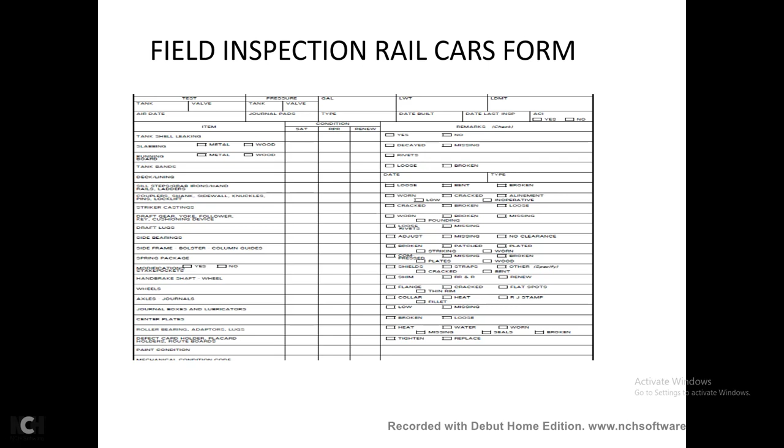Collar heat, RJ stamp fillet, journal box lubricators low or missing, center plates broken and loose, roller bearing, adapter lugs, heat, water worn, missing seals broken, defect card holder, placard holders, and route boards. Satisfactory repair, renew, tighten, or replace, paint condition, mechanical condition code.

Alright, your item: tank shell leaking. Is it satisfactory repair, renew with remarks, check yes or no?

Alright, leaking tanks. A leaking tank should be transferred as soon as possible. If leaking badly, temporary repairs must be accomplished. One method is stuffing waste or rags impregnated with a heavy lubricant into the opening to arrest the flow, where the rupture is not too great.

Too great a rupture, soap or clay may be adequate. These are strictly temporary expedients, only performed to provide time to transfer the lading to another car. If possible, the empty tank car selected to receive the transferred lading should have a similar commodity.

Otherwise lading may be contaminated, or two incompatible substances may become mixed. If possible, the load should be transferred by gravity flow. If gravity transfer cannot be made, siphon pressure may be used. Air pressure should be judiciously used only on cars loaded with heavy oils at a very low level.

Leaks in seams may be caulked temporarily by packing them with twine or lead wool, pushed into place with a sharpened piece of wood or bronze. After the twine caulking has been tamped into place, soap should be padded over it to form a ridge.

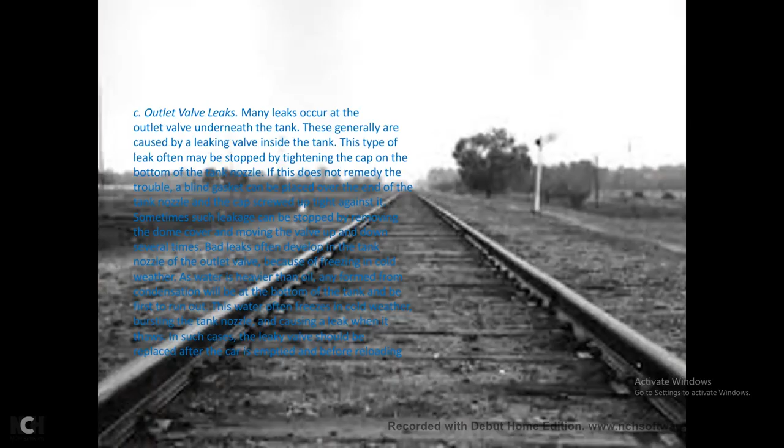Your outlet valve leaks. Many leaks occur at the outlet valve underneath the tank. This is generally caused by a leaking valve inside the tank. This type of leak often may be stopped by tightening the cap on the bottom of the tank nozzle. If this does not remedy the trouble, a blind gasket is placed over the end of the tank nozzle.

Tightening the cap screw against it, and sometimes such leakage can be stopped by removing the dome cover and moving the valve up and down several times. Bad leaks often develop in the tank nozzle of the outlet valve.

Because of freezing cold weather, as water is heavier than oil, water formed from condensation will be at the bottom of the tank and be first to run out. The water often freezes in cold weather, bursting the tank nozzle and causing a leak when it thaws.

In such cases, leaky valves should be replaced after the car is emptied, before reloading. Alright, slabbing: satisfactory repair, renew, check for metal or wood, check decayed or missing.

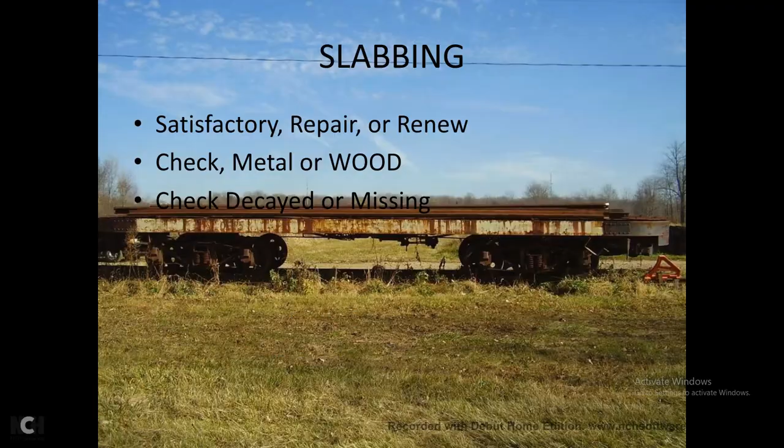When sheathing is damaged by shifting load or other accident, it should be promptly replaced. The damaged portion should be removed, not leaving the damaged remaining portion in place. New boards should be good quality without large or loose knots, and sheathing boards are wider at the opening end than the other. Care must be exercised to keep the boards plumb when nailing them in place.

The board shall be lightly nailed narrow on the first end, and then pried into plumb position and nailed down. The groove of the last board should not be broken off in order to insert the board. The last 3 or 4 boards should be fitted together in the form of an arc, then sprung into position and nailed down. Nails should not be driven into the tongues of the boards, as this splits them and causes leaks. It also prevents the boards from fitting tightly together.

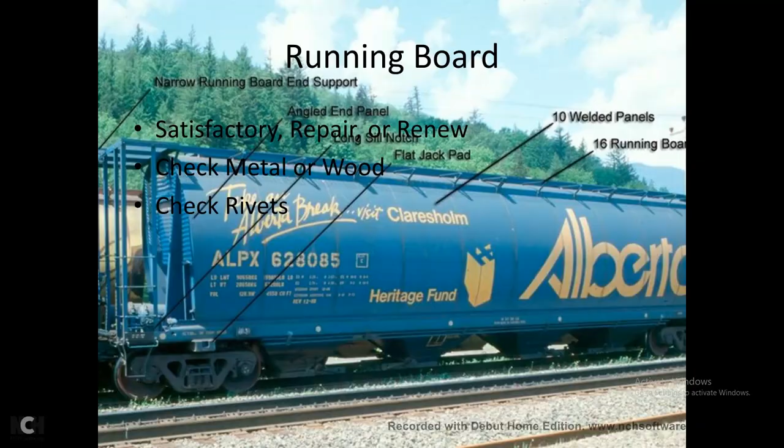Running board inspection: check for satisfactory repair or renewal, check metal or wood, check rivets. Running boards and saddles at the top of boxcars will no longer be required.

Per paragraph 914D of the technical maintenance manual for railroad cars, where used, running boards will be maintained in safe condition using AAR standards as a guide. Nails must not be used on the running boards. If screws become loose, they should be removed and the holes plugged, with new screws applied in another location and secured down tight. When running board saddles become decayed or split, they will be replaced.

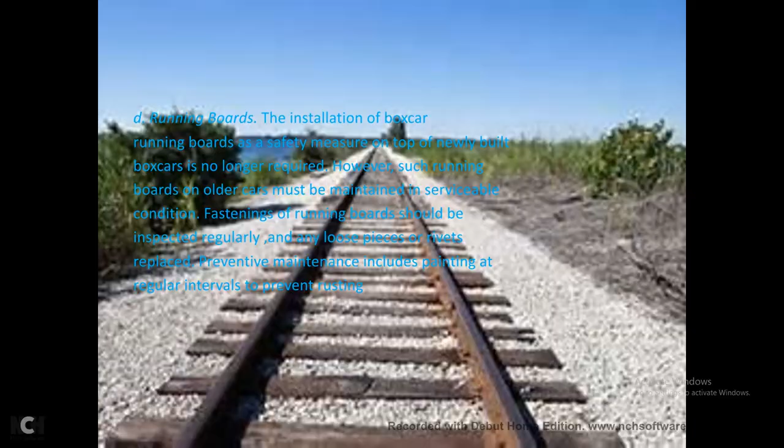The installation of boxcar running boards is a safety measure on the top of the car. Newly built boxcars are not required to have them; however, running boards on older cars must be maintained in serviceable condition. The fastenings of the board should be inspected regularly, and any loose pieces or rivets replaced. Preventive maintenance includes painting at regular intervals to prevent rust.

Tank bands: satisfactory repair, renew, or check for loose or broken shell plates. The repair or straightening of dented shell plates is generally performed in the same manner as repair of the tank heads, as discussed in section D of the tanker maintenance manual.

When it's necessary to remove the tank plate, care must be taken to avoid damaging it while removing the old rivets. The rivet should be driven, with the head on the outside and the buck on the inside, using a well-designed bucking bar instead of a hammer. Rivets must be tight, as loose rivets can be detected by holding a finger on the rivet and tapping it lightly with a hammer.

If loose, the rivet will vibrate slightly. A loose rivet must never be caulked; if it leaks, it must be replaced.

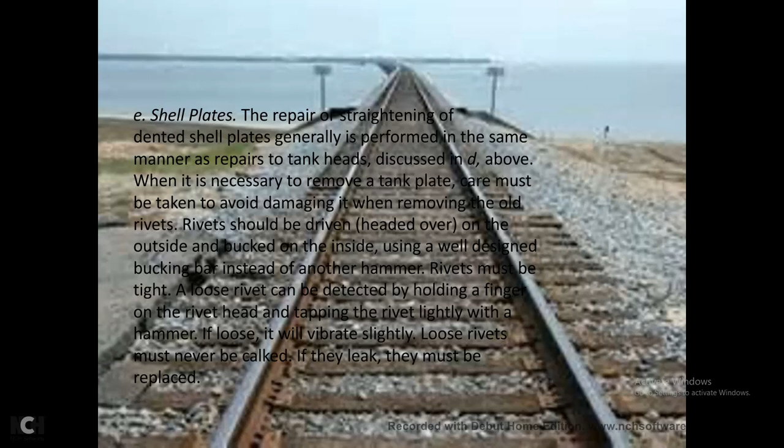Deck lining: satisfactory repair, renew, date, and type.

Flooring: damaged floorboards should be removed and replaced with new boards. If only one of two boards needs to be removed, split the one or both with a sharp pointed bar to prevent damage to the joining tongues and grooves. In any case, after the damaged floorboards are removed, the understructure should be carefully examined for other damage.

The bottom of the board's inner lining must be removed to allow removal of the floorboards, replacing them and applying new flooring. The boards must cover the projecting bolt or rivet heads; place the board in position and tap lightly to make an impression of the obstruction. Then cut a notch in the board large enough for the bolt or rivet head and secure the board in position.

Lining: when a lining is damaged, old boards can be readily pried loose and new ones fitted into place. If any of the larger boards must be replaced, it must be moved so that the belt rail work proceeds down or up as the case requires. When placing new boards, the one at the rail should be secured first before working downward or upward from it. This prevents having the last board positioned next to the belt rail.

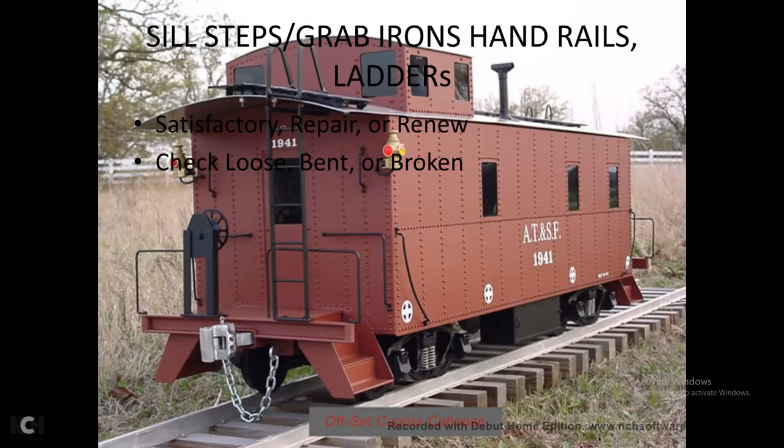Sill steps, grab irons, and handrails: satisfactory repair, renew, check for loose, bent, or broken parts.

Coupler, shank, and sidewall knuckles, pins, and lock lift: satisfactory repair, renew, check for worn, cracked alignment, or low, inoperative conditions.

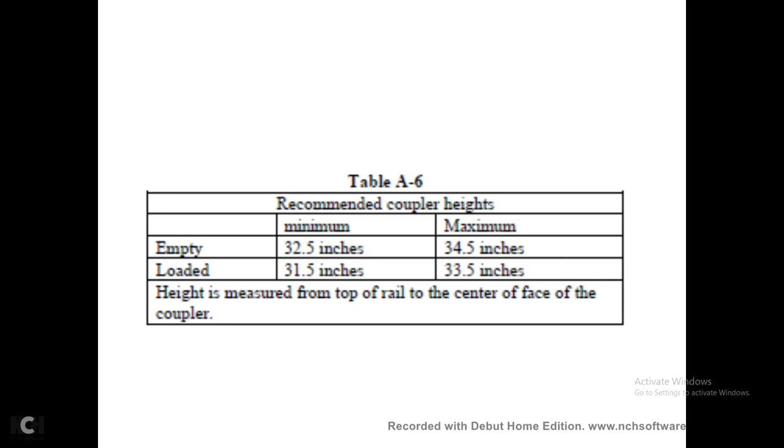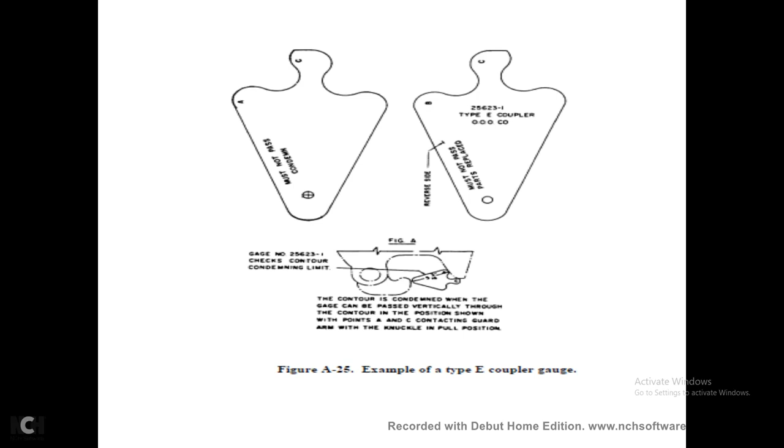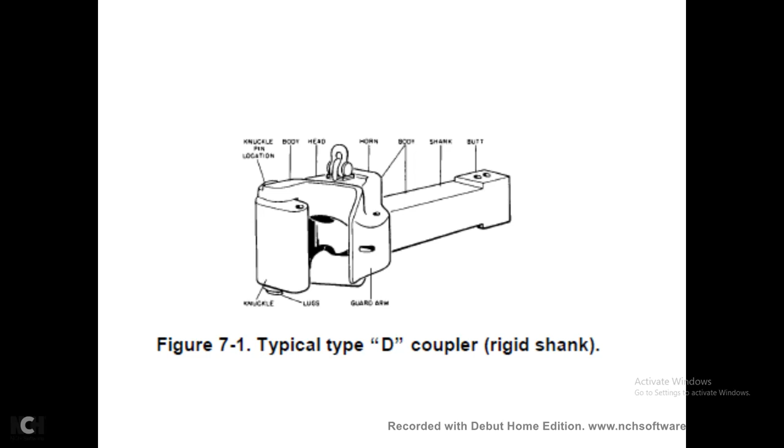Typical type D coupler, starting from the knuckle pin location: the body, head, horn, body, shank, butt, guard arm, lugs, and knuckle. This is a typical type E coupler.

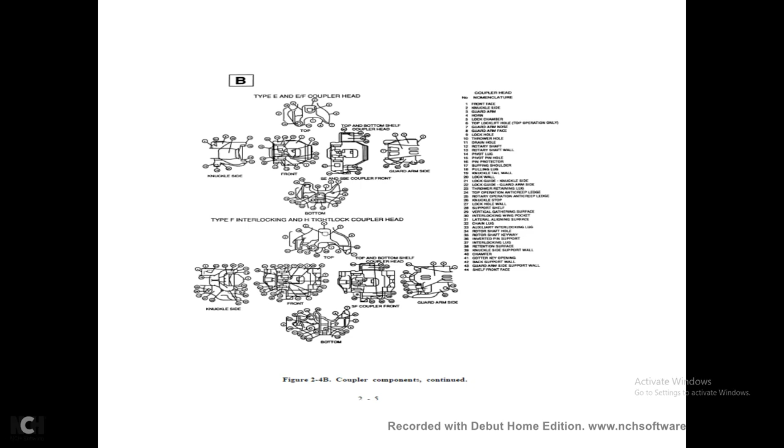This shows the type E and E/F coupler heads. Coupler components continued: type F interlocking and H tightlock coupler heads. Here is an example of a coupler shank head.

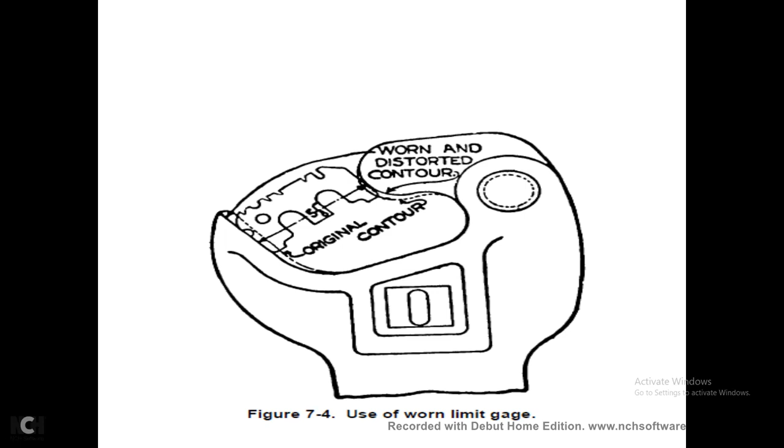Using a contour gauge, and using a worn limit gauge to check worn distorted contour versus original contour.

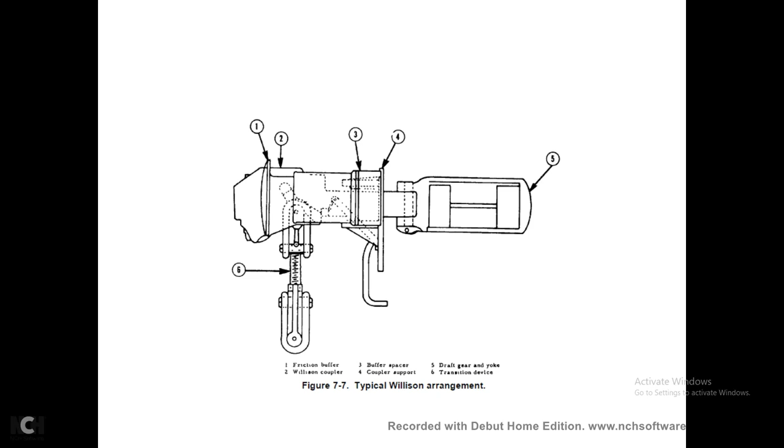2, the Willison coupler. 3, the buffer spacer. 4, the coupler support. 5, the draft gear and yoke. 6, the transition device.

7 and 8, operating parts of type E, Willison coupler: 1, the coupler. 2, the thrower arm and bolt and nut. 3, the lock. 4, the support hook. 5, the thrower. And 6, the filler block.

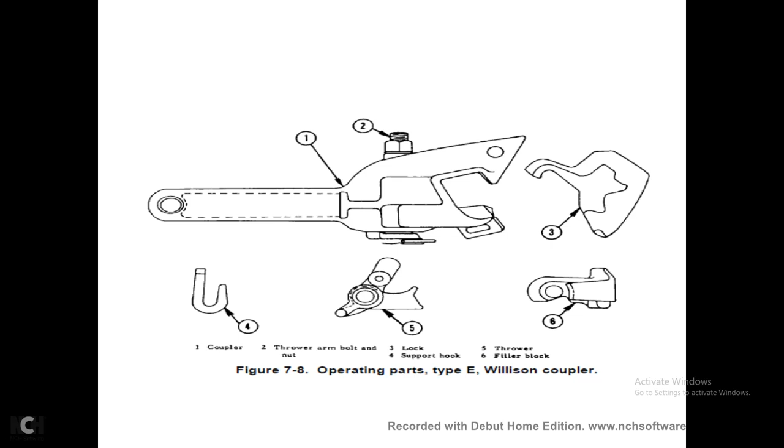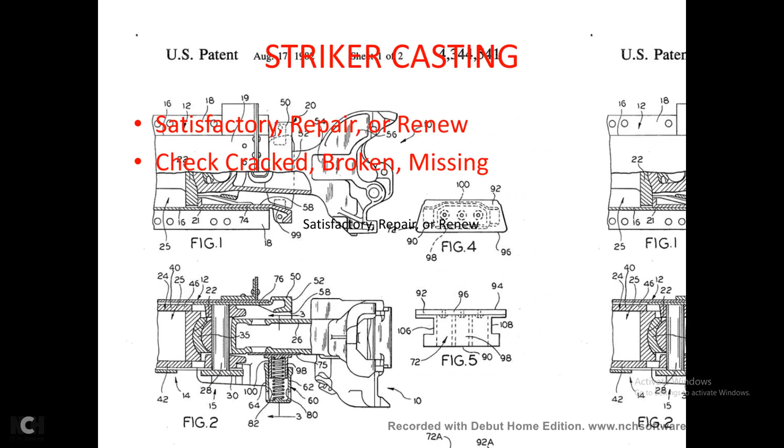Striker casting: satisfactory repair or renew. Check for cracked, broken, or missing parts. Satisfactory repair and renew.

The striker casting is a large metal casting secured over the inside end of the center sill. The casting has three main functions. First,

the lugs restrict the movement of the draft gear. It also acts as a support over the coupler shank. This is the main component to absorb heavy impacts of the center sill.

Due to this, the striker casting has a heavy metal block that lines up with the horn of the coupler. When the car receives excessive pushing force exerted against it, the coupler will compress the draft gear. This allows the horn of the coupler to contact the face of the striker. If the gear becomes severely worn or receives too much impact, it may become damaged, warning of possible problems with the equipment.

Draft gear, yoke, follower gear, and cushion device: satisfactory repair, renew. Check for worn, broken, missing, or pounding parts.

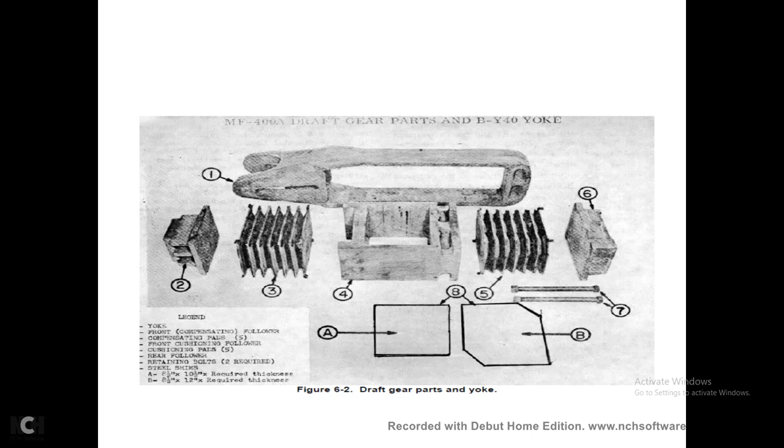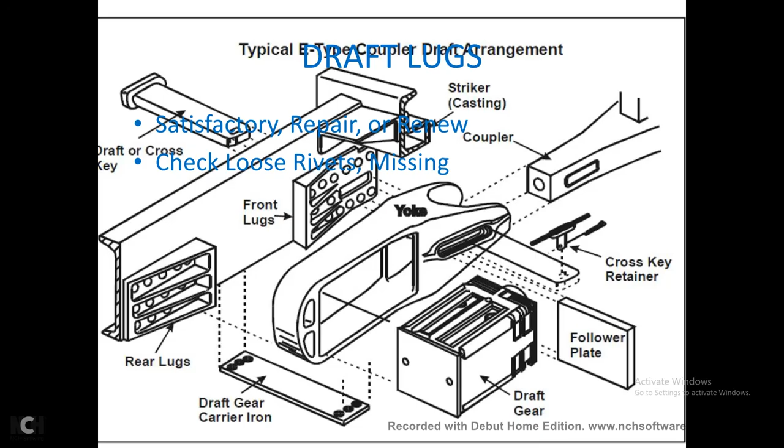Draft gear lug. The draft gear lugs, or draft lugs, can be broken down into front and rear lug. The rear lugs are secured to the center sill at the rear of the draft gear pocket; in some cases they may be part of the center plate spider casting. Front lugs are generally part of the striker casting.

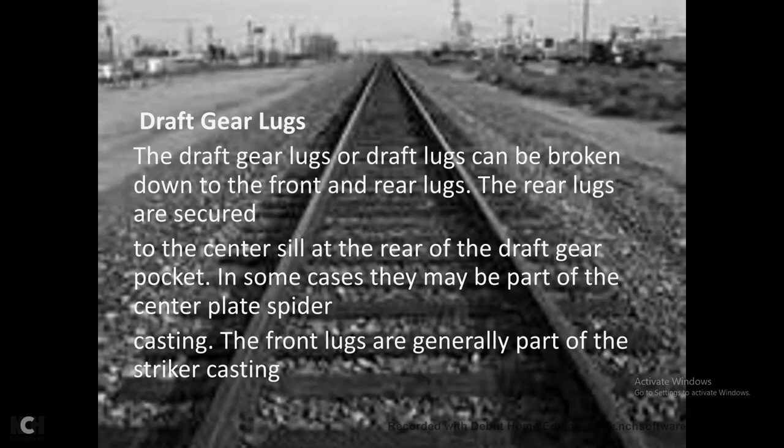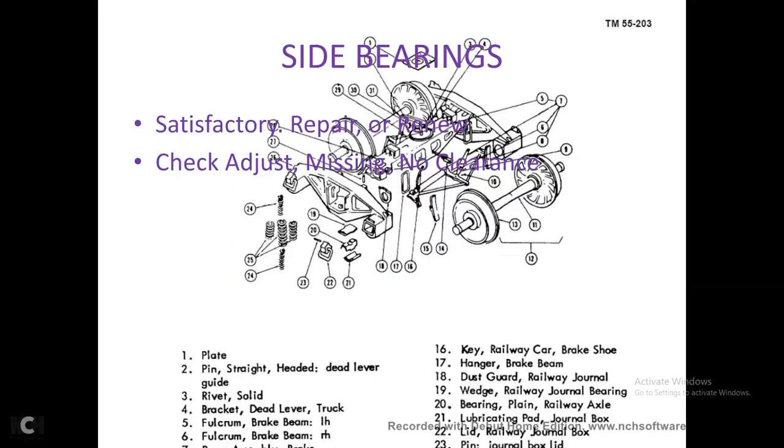Side bearings: satisfactory repair, renew, check for adjustment, missing parts, or no clearance. Side bearings consist of a special steel plate with a flat bearing surface in contact with similar plates on the body bolster, fabricated as part of the bolster.

They're designed to steady the car body to prevent excessive rocking, maintaining intermittent contact with the similar members of the body bolster. Instead of the flat bearing surface, a combination of rollers and rockers may be found on some cars. New car specification requires side bearing clearance to be adjusted within limits of 1/8 of an inch to 1/4 inch per bearing.

Side bearings are inspected with awareness of breakage; repairs or replacement indicated with the trucks should be rolled out from under the facility for that repair. If replacement is necessary, the old side bearing can be burned off and a new one affixed by riveting or welding. Original manner care will be taken in adjusting for proper clearance.

And this shows your side bearing case.

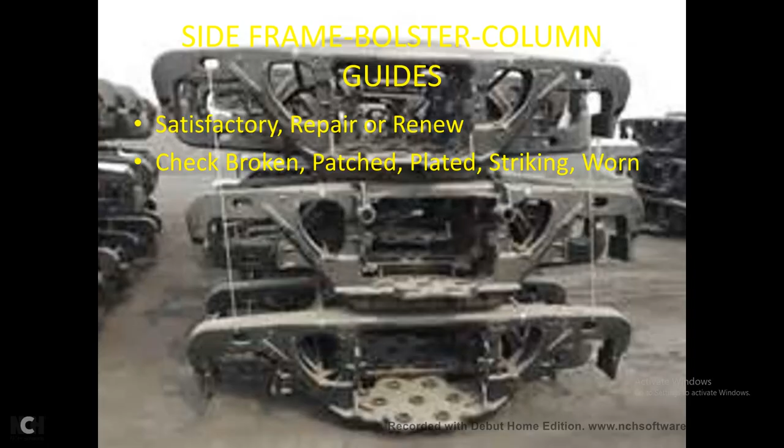Are your side frame bolster, columns, guides satisfactory? Repair, renew, check for broken, patched, plated, striking, or worn. Alright, table A4, truck side frame, bolster, gib wear limits. With the truck dismantled, wear of truck side frame columns and bolster gibs must be measured before disassembly. When wear exceeds the limit shown below, the same must be repaired.

Type of truck: plain bearing truck without built-in features. Repair when the total clearance between the bolster and truck side frame columns reaches lateral 1 1/8 of an inch, longitudinal 3/4 of an inch. Repair with the nominal clearance dimension, bolster to truck side frame, lateral inside 1/8 of an inch, outside total longitudinal 3/16 of an inch.

Alright, type of truck: trucks with built-in snubbing features having plain bearings. All bearing sizes having the 5.5 by 10 inch roller bearings which provide no bearing lateral, 1 1/8 of an inch. The asterisk stands for longitudinal clearance, primarily a matter of wear: frame, bolster, column wear plates, friction shoes. See maintenance instructions from the truck designer or manufacturer. Your lateral repair nominal clearance dimension of the bolster to truck side frame is 1/4 inch.

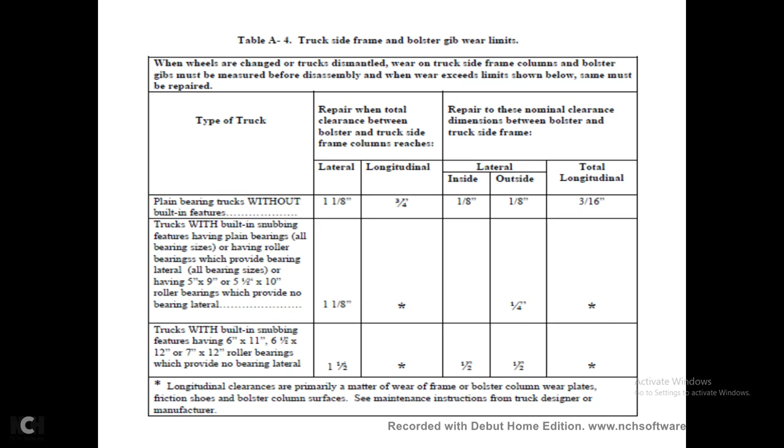Alright, type of truck: trucks built in with a snubbing feature, 6 by 11 inch, 6.5 by 12 inch, 7 by 12 inch roller bearings, which provide no bearing lateral. 1.5 inch lateral repair will be total clearance between the bolster and truck side frame columns. Repair with nominal clearance dimension between bolster and truck side frame, 1/2 inch on the inside and outside.

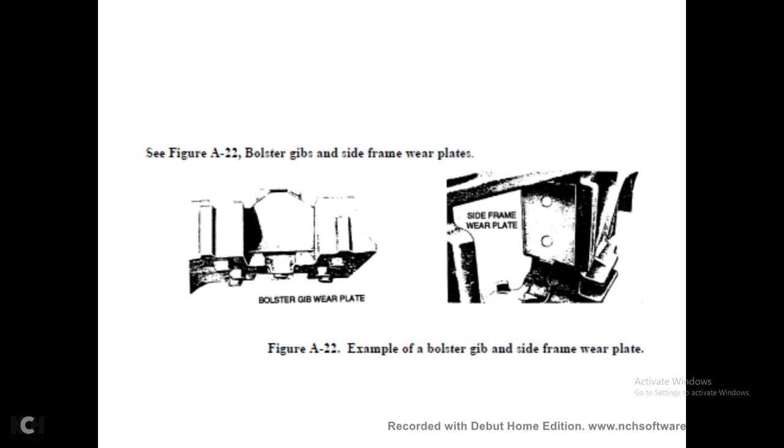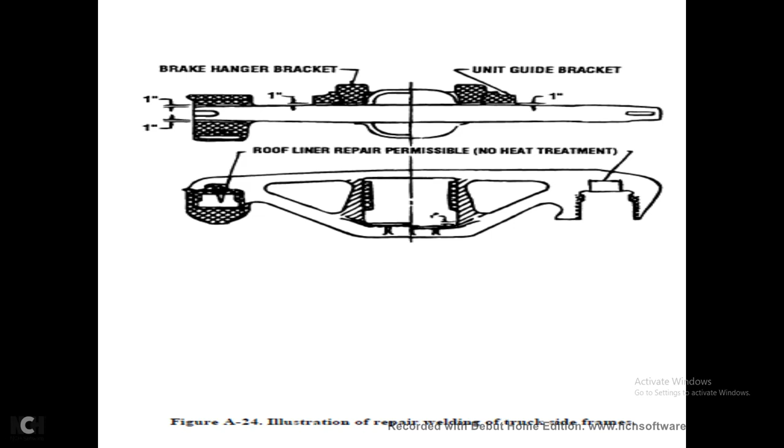Alright, truck spring. General: the truck bolster ends, properly fitted between the columns of the truck side frame, rest on a cluster of coil springs, which seat in the spring seats of the truck side frame and the truck bolster, making up the spring cluster, dependent upon the loads and spring travel dictated by operating conditions. Spring replacement.

Your spring may break in place or become loose. When one spring breaks, it is not serious; however, an additional strain is placed on the remaining springs, and in the case of a heavily loaded car they may be unable to carry the load, possibly resulting in truck failure, hot journal, derailment, or other serious damage. Breakage of the connecting parts may be caused if the spring becomes loose and is eventually lost. If the spring plank is damaged, greater pressure will be applied to the springs, resulting in broken springs and tilting of the truck.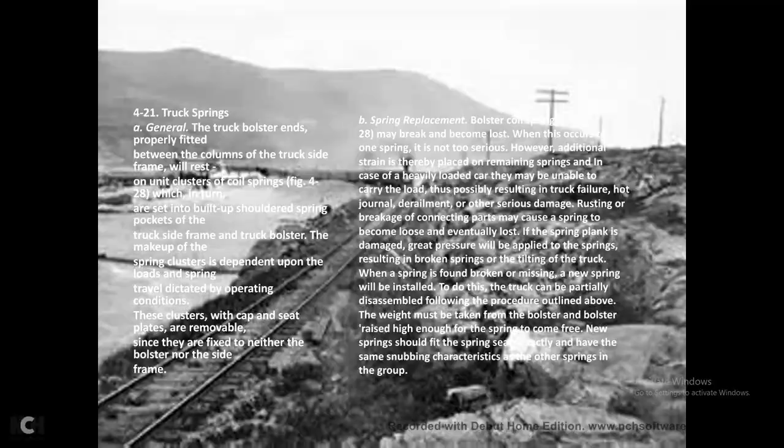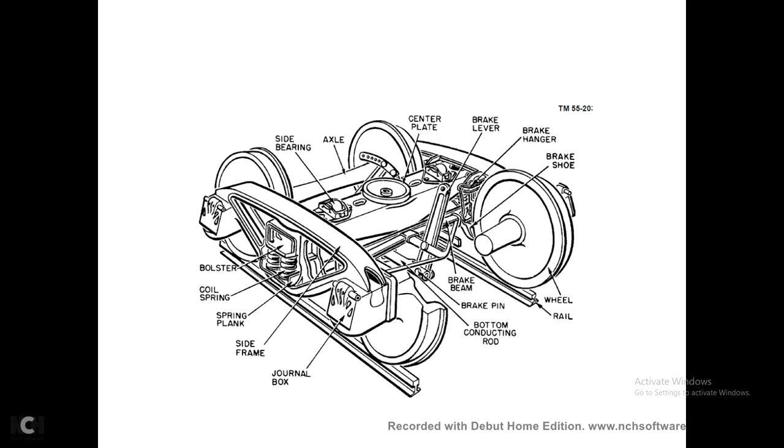The new spring will be installed; to do this the truck must be partially disassembled. Following the procedure outlined above, the weight must be taken with the bolster raised high enough for the spring to come free. The new spring should fit the spring seat exactly and have the same snubbing characteristics as the other springs in the group. Then it shows the truck: side bearing, axle, center plate, brake lever, brake hanger, brake shoe, wheel, rail, brake beam, brake pin, bottom conducting rod, journal box, side frame, spring plank, coil spring, bolster.

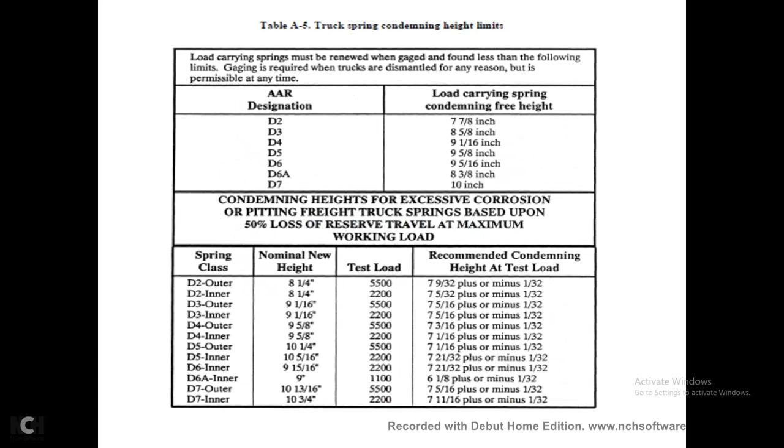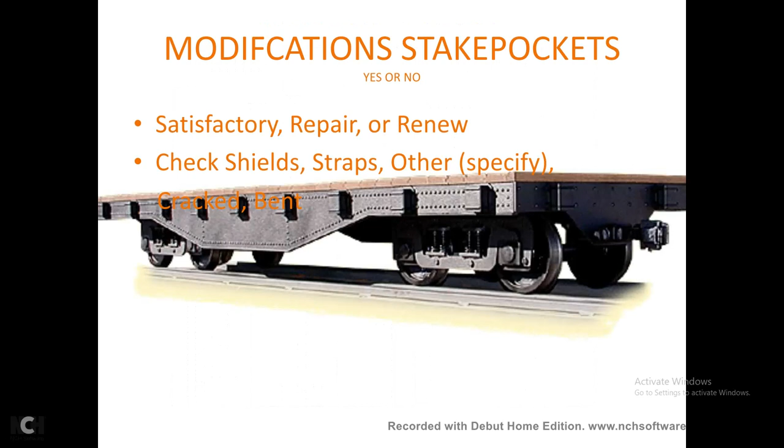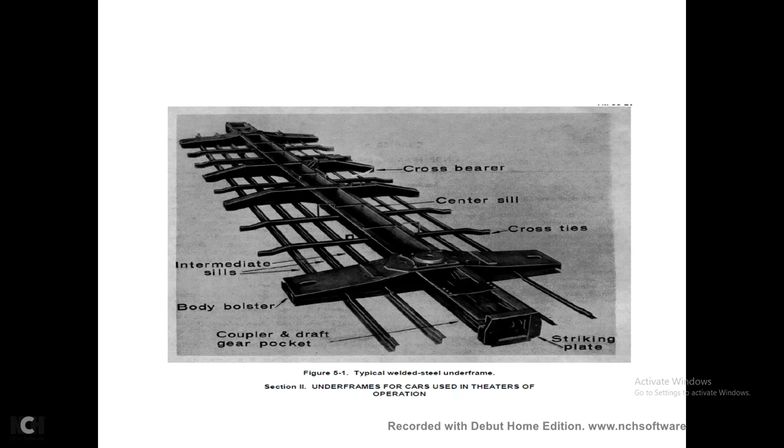Alright, this shows your cross bearer, center sill, cross ties, striking plate, coupler draft gear pocket, body bolster, intermediate sills. Component parts being illustrated on the underframe, lowering completed underframe on the trucks, repair procedures.

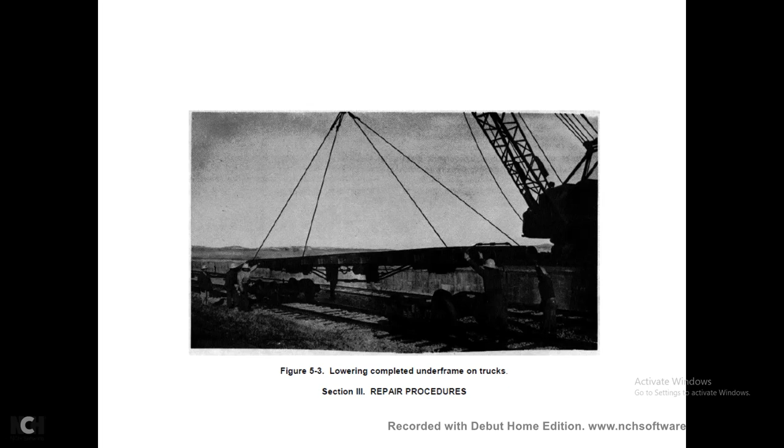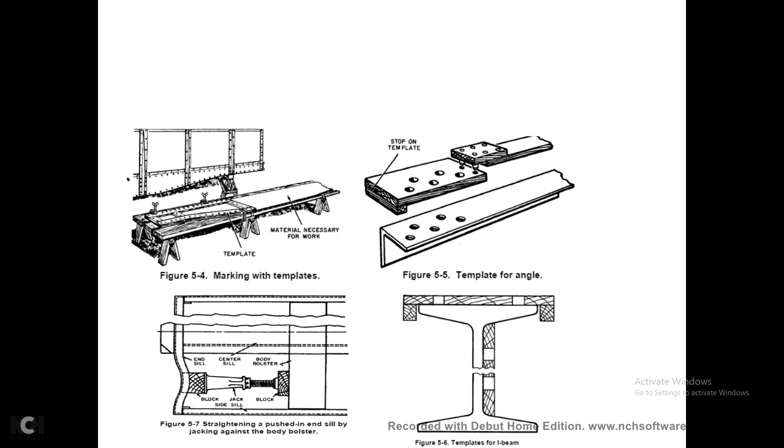Marking with templates, material necessary for work template, stop on template, template for the angle, templates for I-beams, and then shows straightening a pushed end sill by jacking against the body bolster, end sill, center sill, body bolster, jack sill, side sill. Handbrake, shaft, and wheel satisfactory repair, broken check shims R&R renewed.

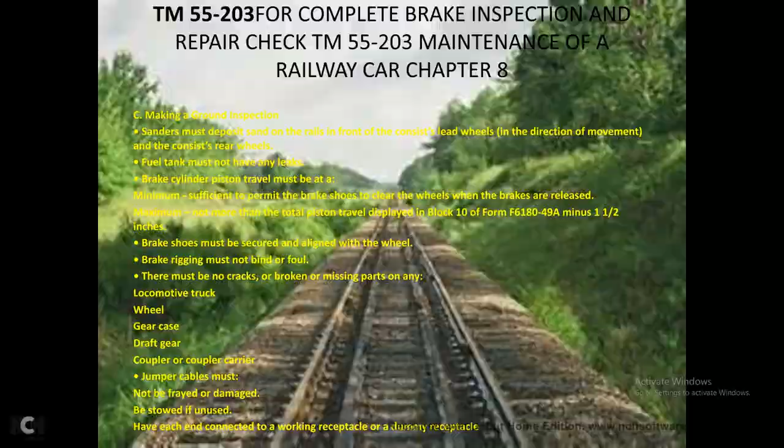There must be no cracked, broken, or missing parts of any locomotive, truck, wheel, gear case, draft gear, coupler, carrier. Jumper cables must not be frayed or damaged, must be stowed, and if unused, have each end connected with a dummy receptacle. CSX air brake train handling and equipment.

Alright, so it shows 5000 air brake general, 5050 locomotive air brake equipment, 5100 air brake test general requirements, 5150 making locomotive air brake test, 5200 making train air brake inspection testing, 5300 locomotives, 5350 locomotive condition, 5400 locomotive operation.

5500 fundamentals of train handling, 5550 conventional train handling, 5600 helpers, 5650 special train handling procedures, 5700 telemetry equipping trains, 5750 telemetry qualification, 5800 arming telemetry two-way capability, 5850 testing two-way telemetry emergency capability.

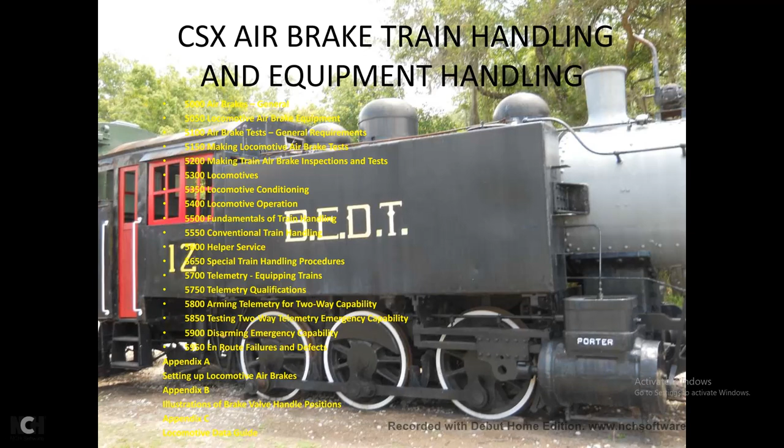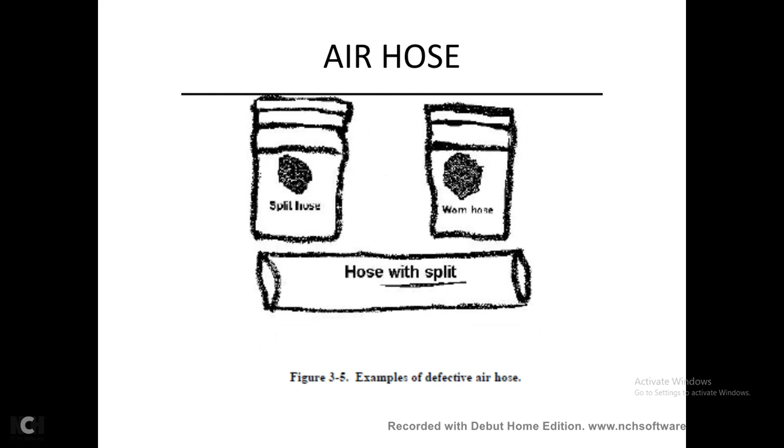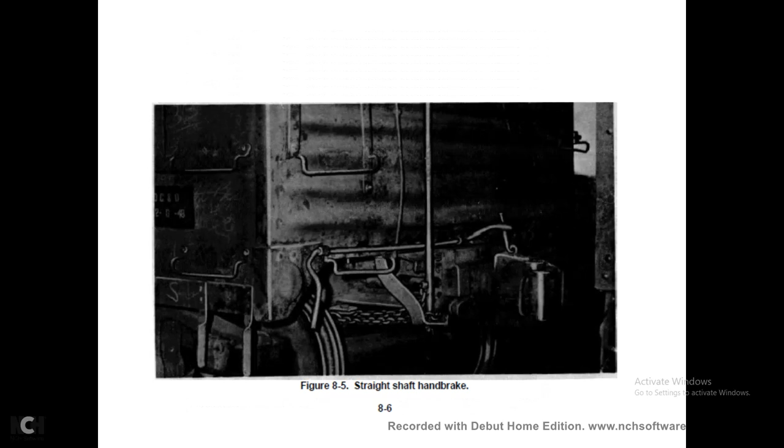Alright, types of trucks. Car trucks have been generally described in paragraph 3-2 of the TM 55-203. There are many different types with the same general characteristics. The text is limited to conventional four-wheel, cast bolster, coil spring, side frame freight car trucks, discussed in 4-19 through 4-21. Inspection, repair and maintenance of the car trucks is essential to railway operation. Wheels must roll to move personnel, equipment, and supplies by rail.

4-2. Maintenance of the truck as a unit. Because of the wear of the wheel treads, journal bearings, and possible shortening of the springs resulting from set, the relative height of coupled cars is often disturbed. However, the car can be brought up to the proper level by placing shims and liners of the required thickness under the truck springs and or replacing weak springs. This will raise the truck bolster and body of the car.

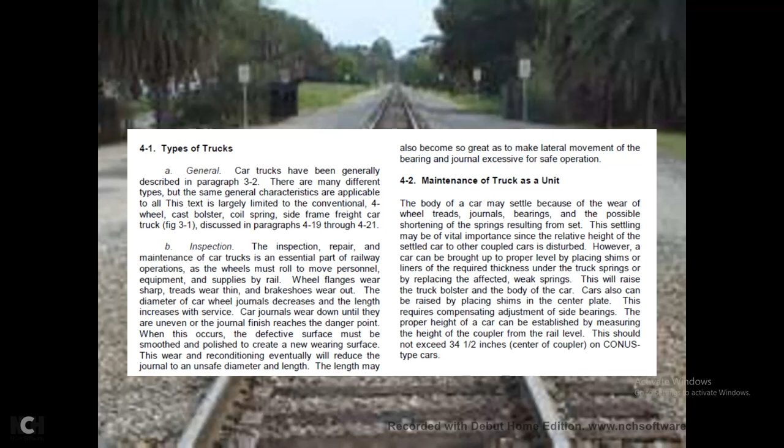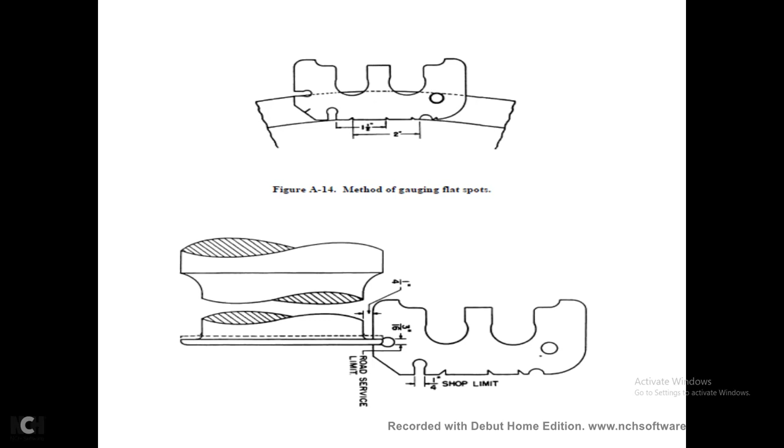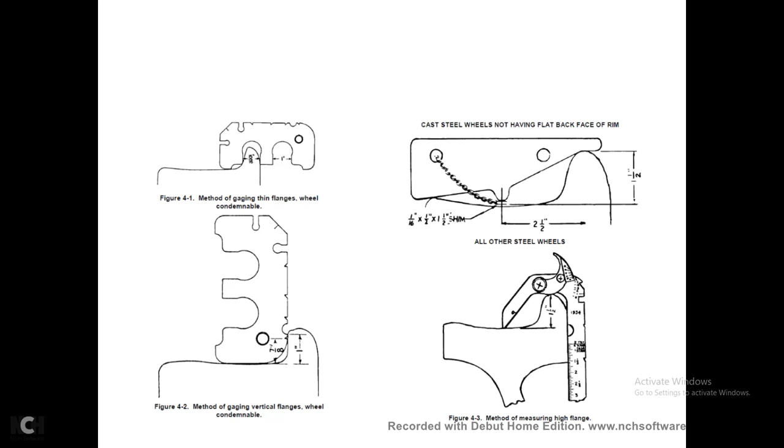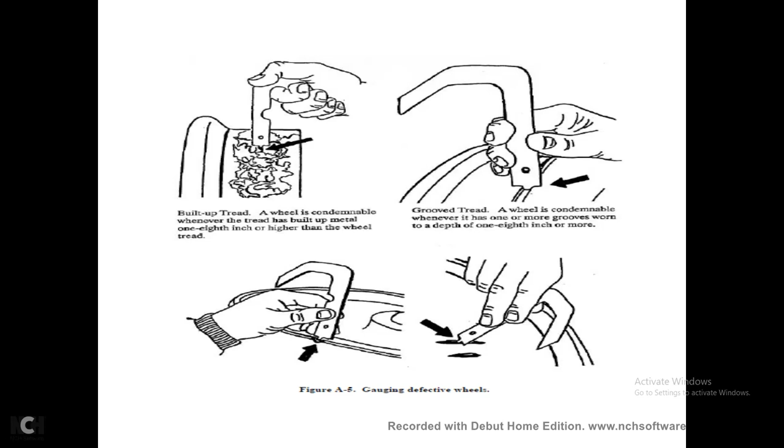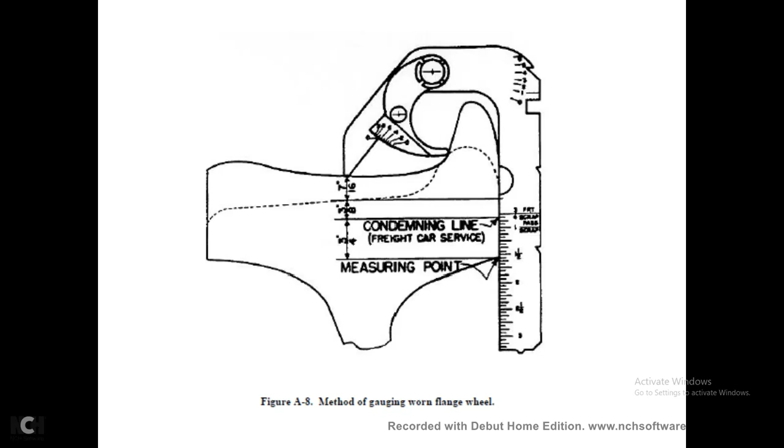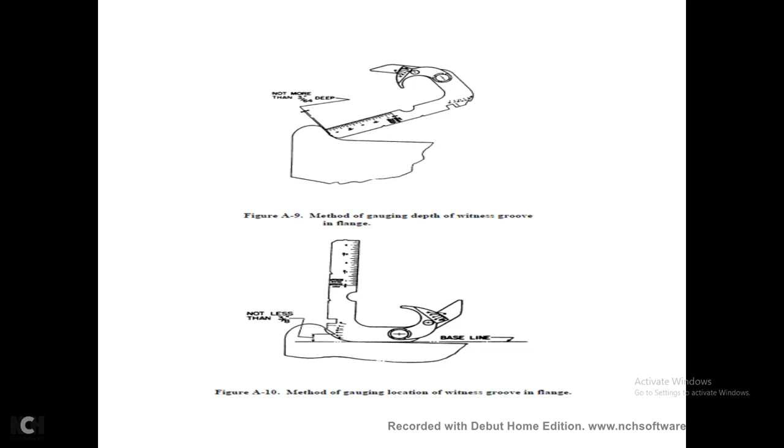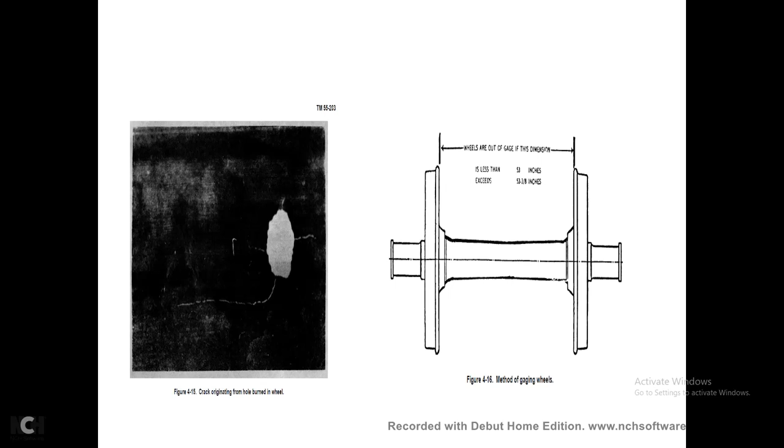Class C type axle, 5 by 9, 6.5, 40 by 65, 70 by 100, 7, 45 by 70, 75, 110. Class D, 5.5 by 10 inches, 7 inches nominal wheel seat diameter, 45 by 70 cast iron, 75 by 110 cast iron steel. D, 5.5 by 10, 7 and 9/16 of an inch, 50 by 75, 80 to 120.

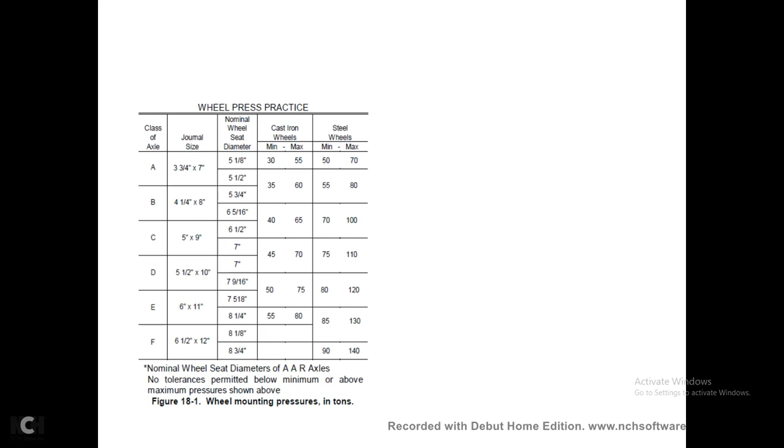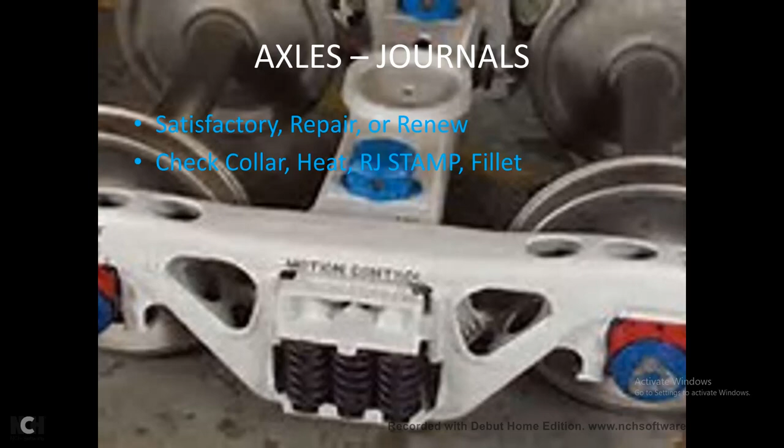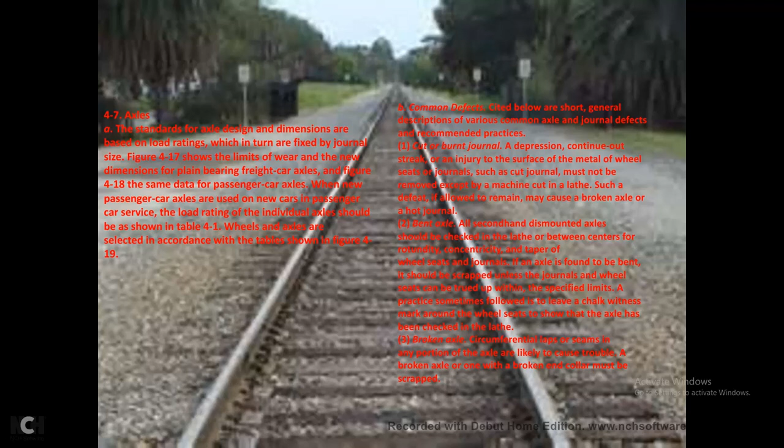2. Bent axle. All second-hand dismounted axles should be checked in the lathe between centers for concentricity. If on tapering over the wheel seat and journals the axle is found to be bent, it should be scrapped unless journals and wheel seat can be turned up within the specified limits. Some shops follow the practice of leaving chalk witness marks on wheel seats to show axles have been checked in the lathe. Broken axle: circumferential laps and seams on any portion of the axle likely to cause trouble. An axle broken off at the end of the collar must be scrapped.

Back journal fillet. The standardized lathe tool simplifies the practice; journal fillets are normally turned to the standard radii on axles. The rules, however, permit with second-hand axles a minimum back fillet radius of 1/8 of an inch on C and larger axles, back gauge wheel defect gauge. Minimum radius employed when axles can be reapplied, refinishing, restoring the fillets. Standard radii would cause the journal to scrap for deficiency in length or diameter.

Journal fillet, journal length limit. The length of the worn journal should be measured between a point 1/4 inch above the journal surface on the face of the end collar to a point 1/8 inch below the dust guard.

C for the back fillet shown in figure 4-20. Any gauge for the measure of the length of the journals in accordance with the method of the gauge can be used. Figure 4-21 illustrates the type of the gauge used for the railroads throughout the United States.

6. The collar worn limits will conform to those shown in Figure 4-18. Journal diameter worn below limits will conform to those shown in 4-18. Wheel seat worn below limits will conform to those in 4-18.

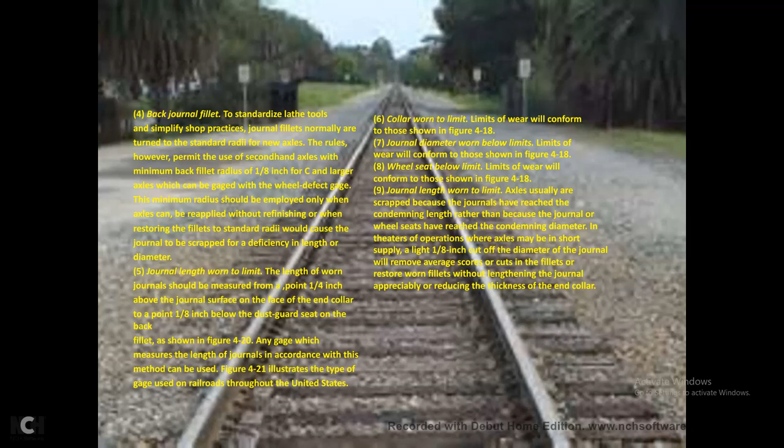Journal length worn limit axles usually are scrapped because the journal has reached condemning length, or because the journal wheel seats have reached the condemning diameter, and in theater operations where the axles will be in short supply. A light cut of 1/8 inch off the diameter of the journals will remove average scores, or cuts of the fillet, restoring worn fillets without lengthening the journal appreciably or reducing thickness of the end of the collar.

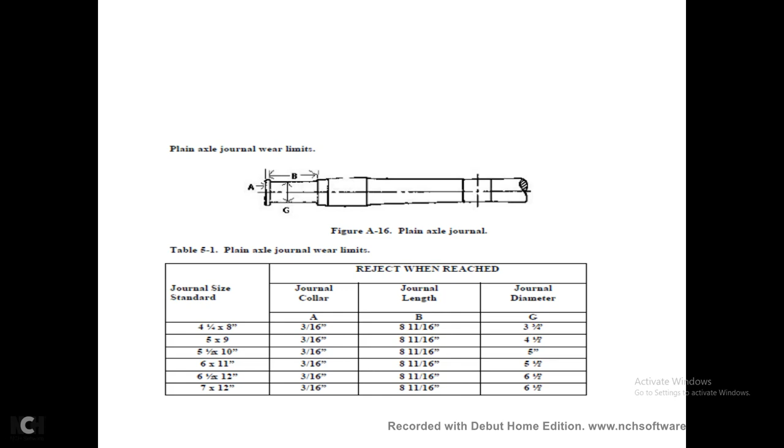3/16 inch journal collar, 8 11/16 journal length, 5 1/2 journal diameter. 6 1/2 by 12 inches: 3/16 of an inch, 8 11/16, 6 1/2 inches. 7 inch by 12 inch: 3/16 of an inch, 8 11/16 of an inch, 6 1/2 inches journal diameter.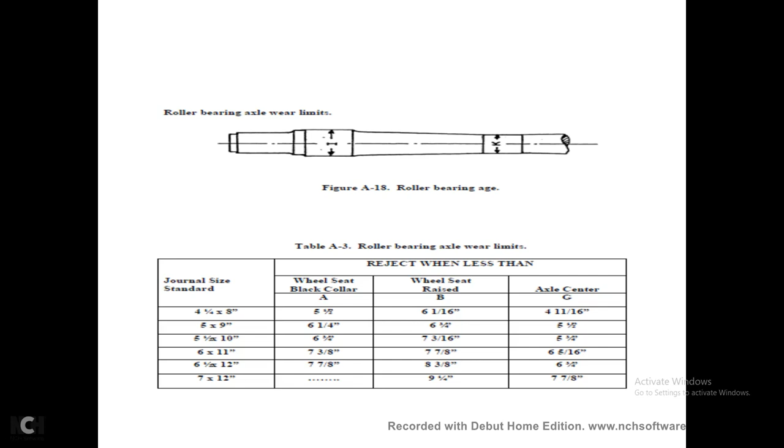Axle center 5 3/4. 6 by 11 inches journal size standard: 7 3/8 inch wheel seat, back collar, 7 7/8 inch wheel seat raised, 6 5/16 inch axle center. 6 1/2 inch by 12 inch: 7 7/8 of an inch, 8 3/8 of an inch wheel seat raised, axle center 6 3/4 inch. 7 by 12 inches: only wheel seat raised 9 1/4, axle center 7 7/8 of an inch.

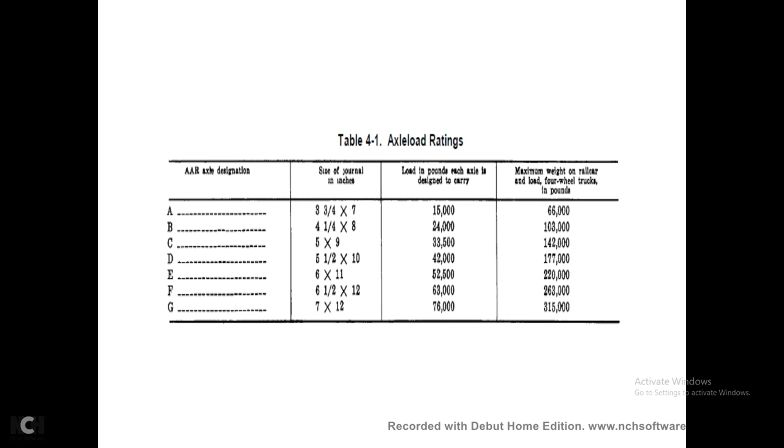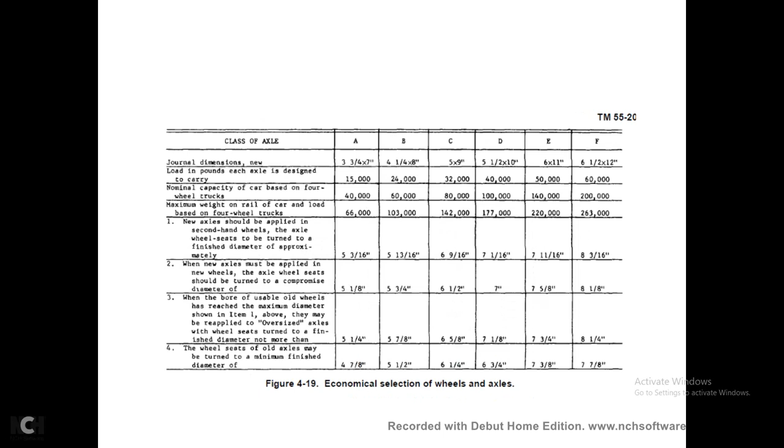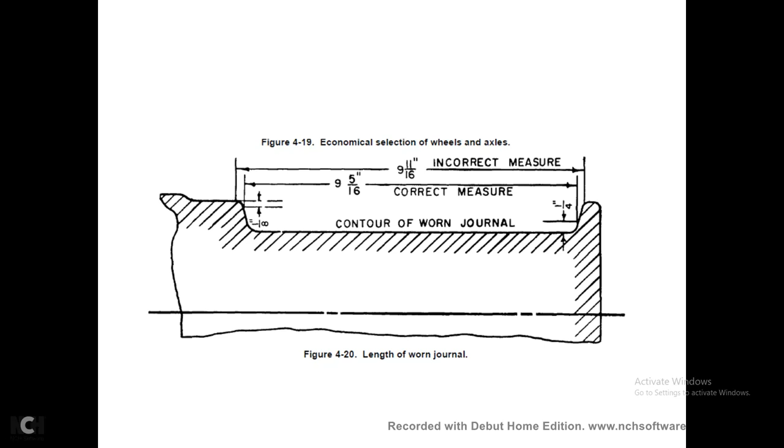Alright, your length of the worn journal. Shows the contour of the worn journal with the correct measurement as 9 5/16 of an inch, and incorrect measurement 9 11/16 of an inch, and 1/8 of an inch depth by 1/4 inch depth. Alright, this shows the gauge used for measuring length of the journals on Class A to F axles inclusive.

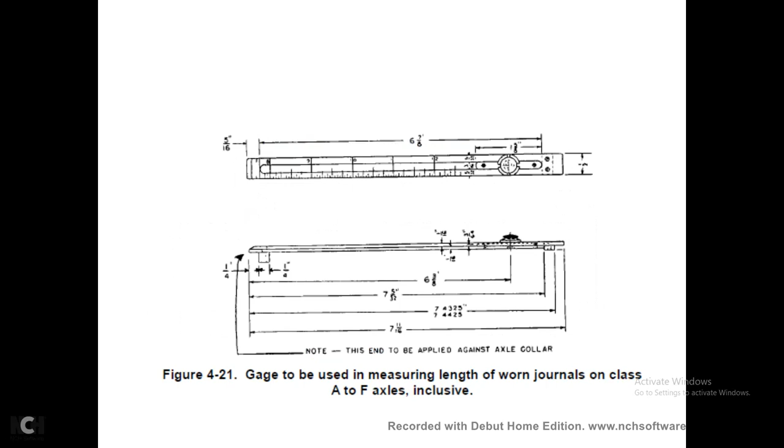Alright, journal box and lubricator satisfactory repair, renewed, check low or missing. Inspection of journal packing, general. When inspection reveals any of the following conditions, action shall be taken as indicated below. If the journal packing has dirt mixed with the grease, the box should be repacked. A journal box containing excessive amounts of snow and ice water should be repacked.

Journal boxes containing excessive amounts of snow and ice water should be repacked. Particular attention should be given to all boxes located under drains of ice bunkers or refrigerator cars, when found containing drippings. The journal boxes having high water should be cleaned and repacked as soon as practical. Careful examination must be made of corroded and pitted journals.

Re-oiling. If the packing should be dry along the top after it has been reset, or less than 1/2 inch of oil is in the bottom of the box, oil shall be added starting at the back of the box and working the oil can spout forward along the side of the journal. If the direction of car movement is known, oil should be added on the rising side of the journal only, with the box lid closed properly. There should be no loose threads of packing hanging outside.

In cold weather, cut-back or thinned car oil, a thin oil having a flash point of 300 degrees Fahrenheit or above, may be used. The use of kerosene or any oil with a flash point below 300 is prohibited.

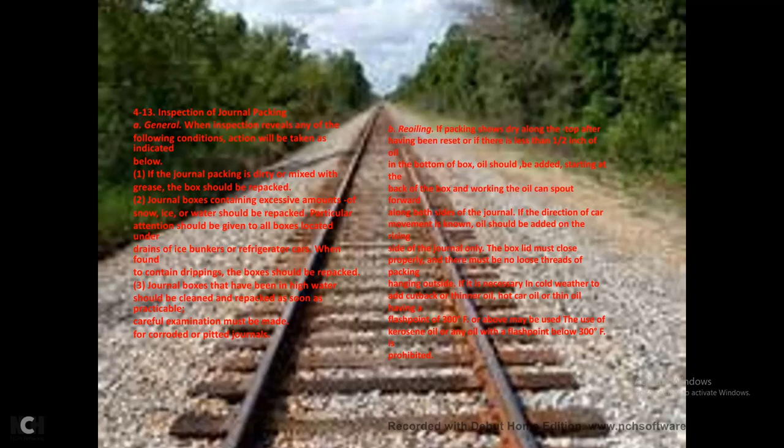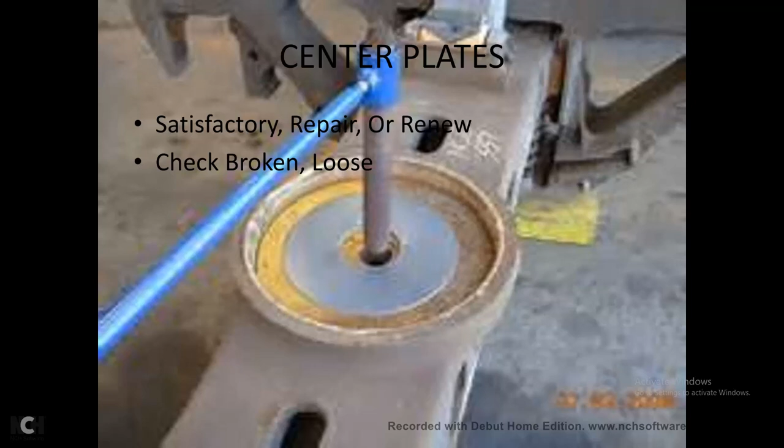The center pin should be inspected for presence of dirt, grit, scale, and foreign material which cause binding and wear, and the center plate with the pin should be lubricated with a suitable hard grease prior to being replaced. Under the car, the center plate should be examined for cracked or broken portions. If damage is noted, the center plate and bolster, as necessary, should be removed as outlined in A and B above, and replaced with a new one where the center plate is riveted.

Single liners in the center plate to adjust coupler height are permissible, providing the vertical bearing surface of the center plate is not reduced to less than 1/8 of an inch. Such liners should be only one piece not exceeding 1/4 of an inch. To inspect the center plate for cleaning and lubricating, the car can be raised by hoist or jacks to sufficient height to make the center plate visible for inspection. Care should be taken not to put hands or fingers in the center under such circumstances.

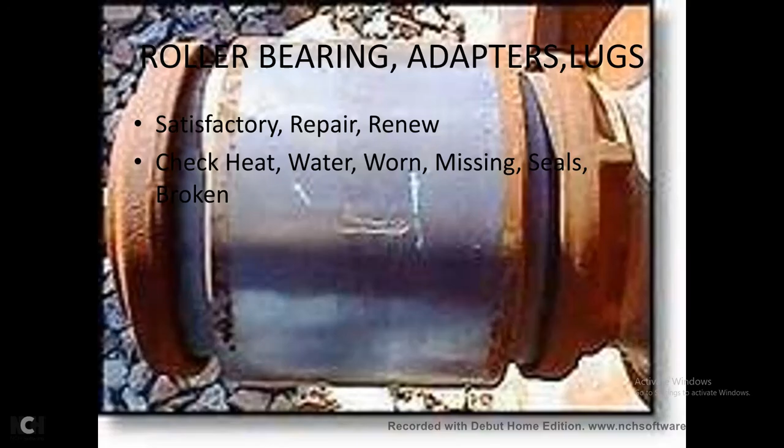Roller bearing adapters and lugs: satisfactory, repair, renewed; check for heat, worn or missing seals, or broken. Renew journal bearings when the back lug is broken, worn 1/4 of an inch or more lengthwise at either end, with combined wear lengths of 3/8 of an inch or more, lug worn to a depth of 1/8 of an inch or more in an area which is over 50% of the contact face, or combined wear of both sides with lug extension 1/4 of an inch or more.

Lining is worn through to brass at any location 3/8 of an inch or more above the lower edge of the brass side walls. Lining is loose or broken out. Lining is pulled, with the journal contact area indicated by the wearing pattern. Wheels and axle change: two bearings for each set of wheels missing.

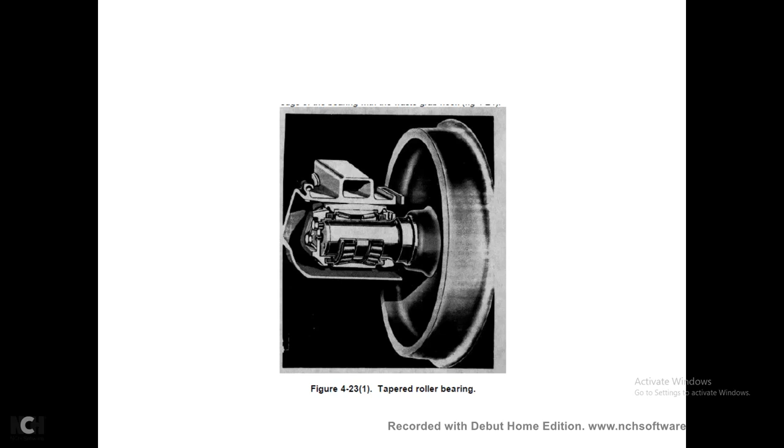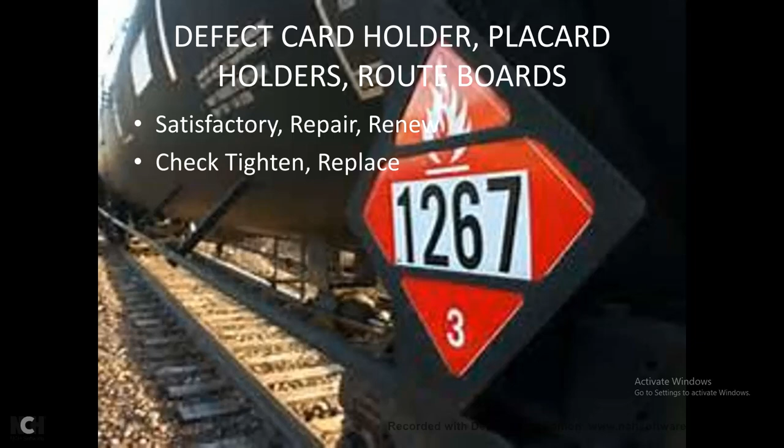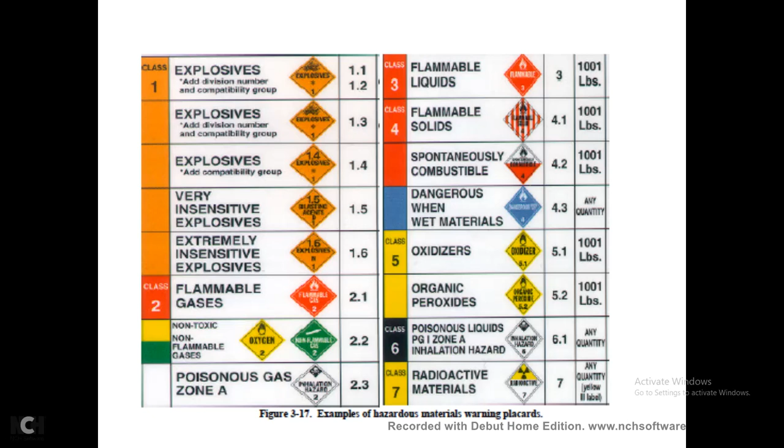Defect card holders, placard holders, route boards: satisfactory, repair, renew; check, tighten, and replace. This gives you class 1 explosives, class 2 flammable gases, class 3 flammable liquids, class 4 flammable solids, spontaneously combustible and dangerous when wet, class 5 oxidizing and organic peroxides, class 6 poisonous liquids, class 7 radioactive material.

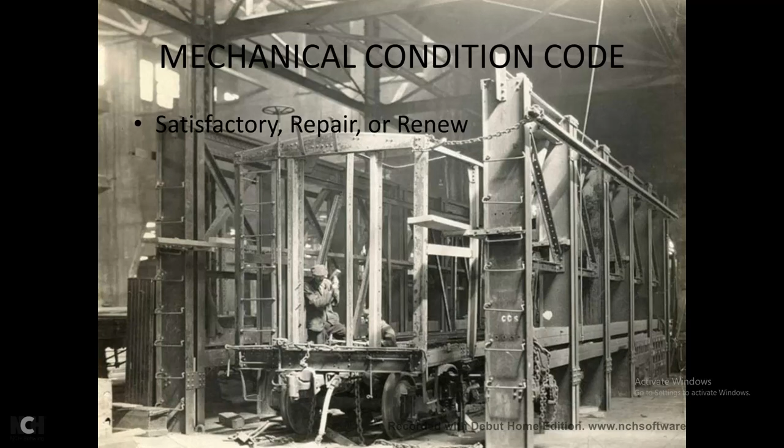DA Form 2028, and that completes the video for railroad cars.